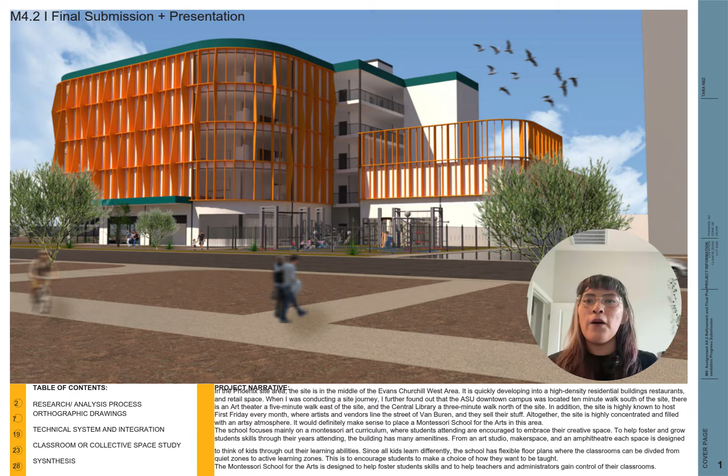This is my final upload for the spring 2026 semester. And this semester I had the opportunity to design a school called the Montessori School for the Arts.

In the beginning of the semester, we did a precedent study analysis. I chose a school for the Montessori by Herman Hertzberger in Delft, Netherlands. Some key components I came across while studying the school were the L-shaped classrooms, which separated the formal and informal classroom settings. And I wanted to take this study analysis into the project I am currently doing.

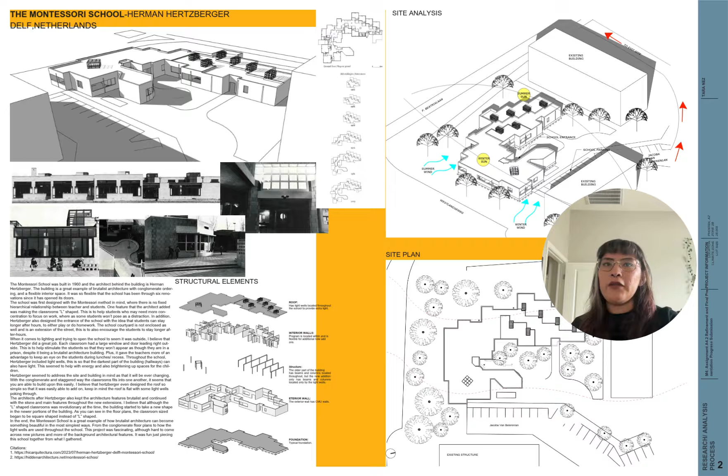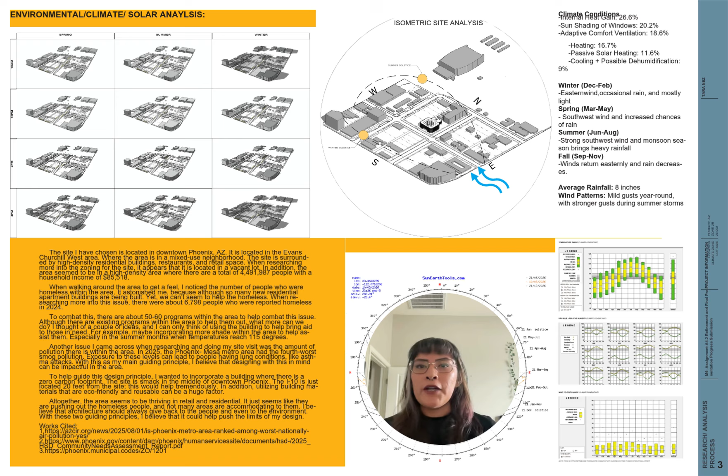So after the precedent study analysis, we started to work on the sites for the rest of the semester. I chose the downtown Phoenix site located on Portland Avenue and 2nd Street. During this time, I did sun studies, I researched the wind, and I researched the annual rainfall in the Phoenix area. And you can see that throughout the graphs as well.

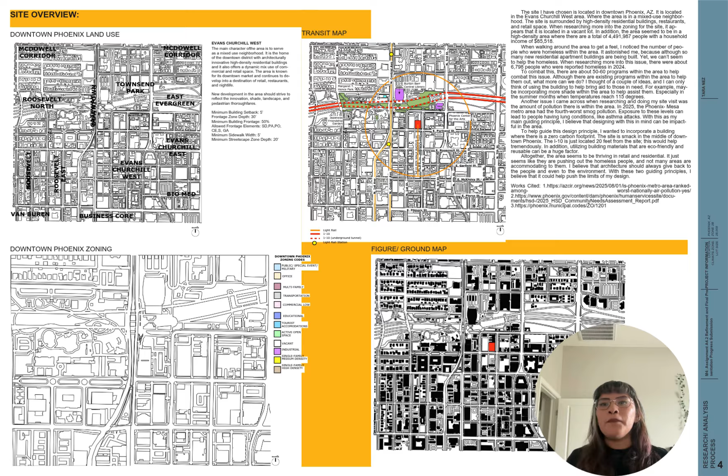So after researching the site analysis, I started to look at the site context in terms of the surrounding areas. I found out that the site is surrounded by empty lots, so you can use those lots for whatever usage you want. In addition, there are many restaurants. It's highly active on First Fridays because there's a First Friday celebration where people come on Van Buren Street and sell their artwork. In addition, there's an art theater just about a 5-minute walk away, and then a 10-minute walk from the ASU downtown Phoenix campus.

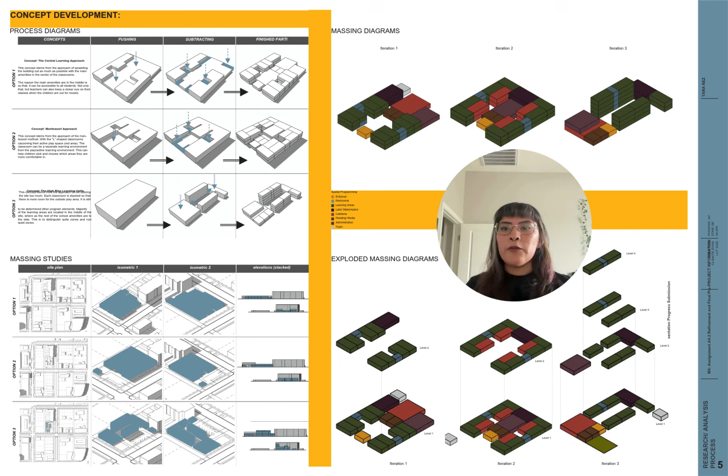So after the site analysis and site context research, we started to do different approaches of how we're going to be designing onto the site. There are 3 that I have conducted: the central learning approach, the Montessori approach, and the high-rise learning units. So moving forward, I did the central high-rise learning approach, where it marries the central learning and the high-rise.

With this approach, learning units are the focal point of the site, and the school offices and administration are in the building to the side. In addition, there are L-shaped classrooms. The school offers an art classroom and a technology classroom. And then there are program amenities, with a library and art space where students can sell their artwork. And in the center, there's an amphitheater, so plays and concerts can happen when there's no usage for the school.

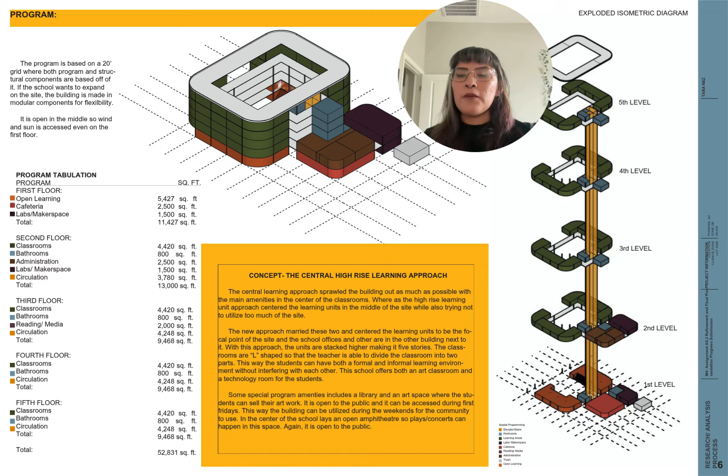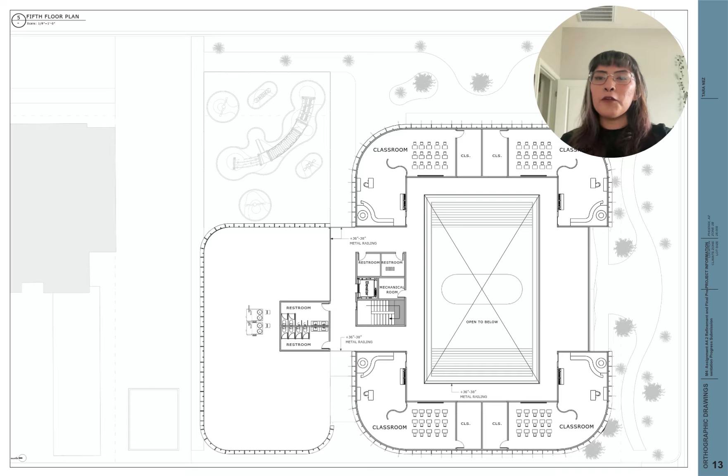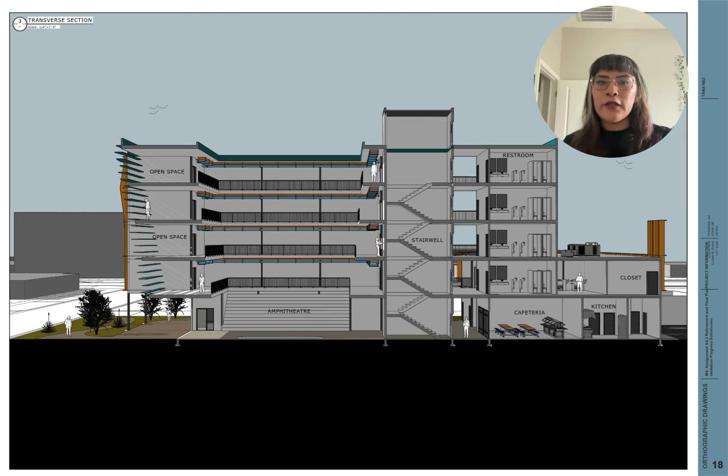This is a transverse section at 1/4 scale. You can see the amphitheater, the teal facade, the cafeteria, kitchen, restrooms, and how everything coexists and is stacked up together. So this is a structural isometric progression.

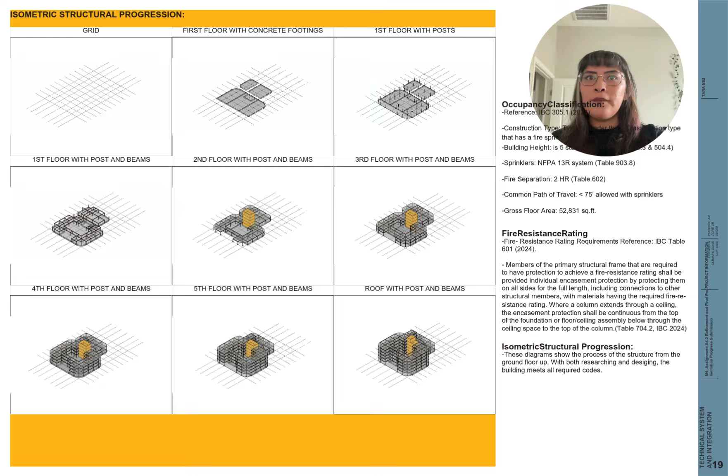The occupancy classification is type 1B, where it is 5 stories at 68 feet. Sprinklers are an NFPA 13R system. Fire rated at 2 hours. Common path of travel 75 feet, allowable with sprinklers, and the gross floor area is 52,831. So this is the exploded isometric of the facade. It is comprised of 4 different vertical fins.

It appeals to the architectural character of the building. In addition, it protects the building from rain, wind, and sun. It improves energy efficiency by insulating and regulating temperature, enhances acoustics, and allows for natural light to come in without

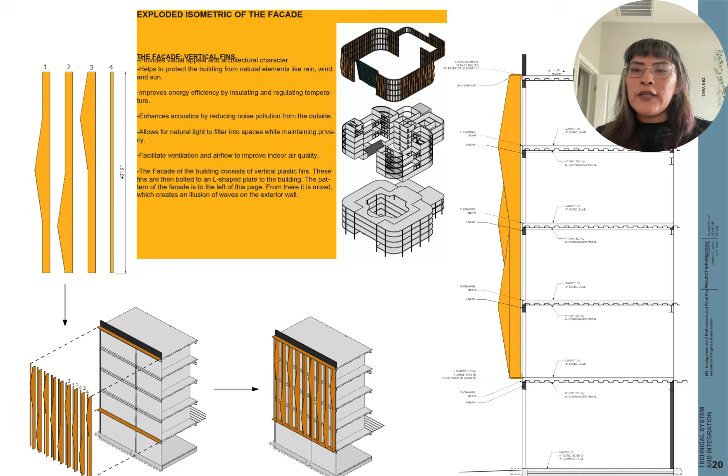sacrificing your privacy. These are held by an L-shaped plate at the side of the building. So this is a passive system that I incorporated into the building.

There's solar geometry and fenestration with the solar shading system, i.e. the vertical fin facades and the horizontal facade. There's natural ventilation coming in, as you can see in the diagram. It comes in through the gap in the building.

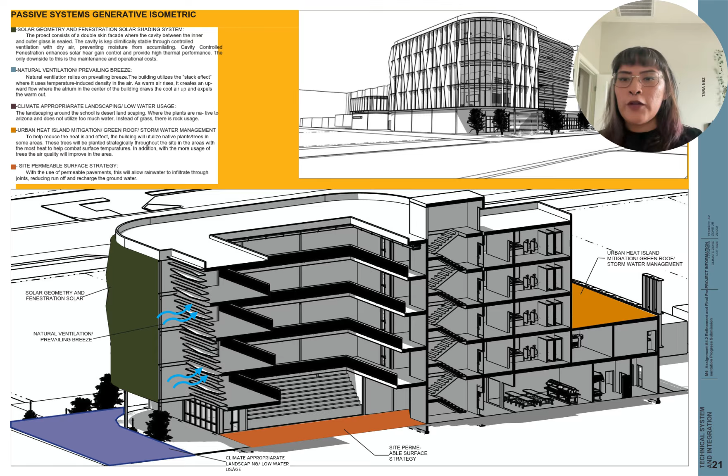There's climate appropriate landscaping and low water usage, so the plants and trees are native to the area. There's stormwater management on the roof, so that whatever water it retains is going back into the land. The site has permeable surfaces as well, so the water can infiltrate and not cause too much stormwater runoff.

So for the active system HVAC, I did the VRF distribution. This one provides precise temperature control for individual zones, energy efficiency, reduces installation space with compact design and fewer ducts, and it also enhances indoor air quality.

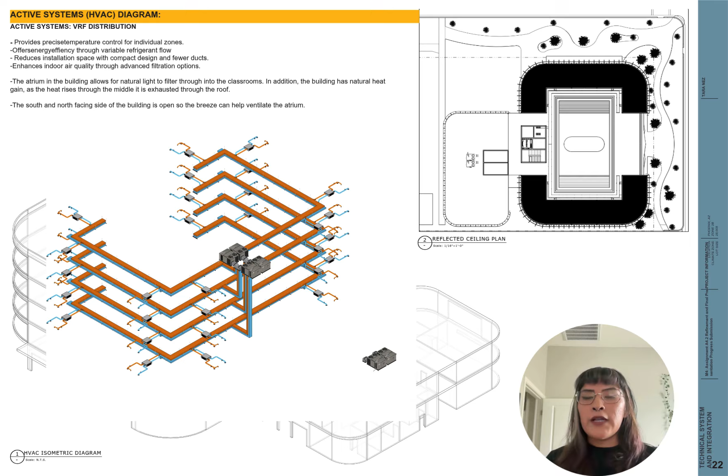In addition, natural breeze can come into the building through the opening on the south facing side. That way it can go in from the south and exit from the north.

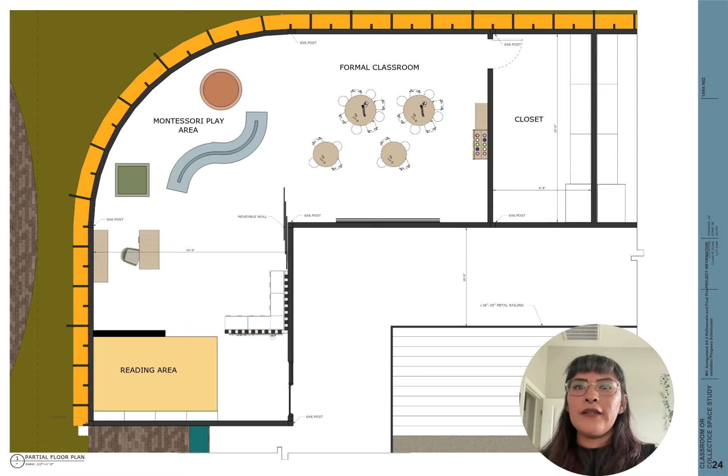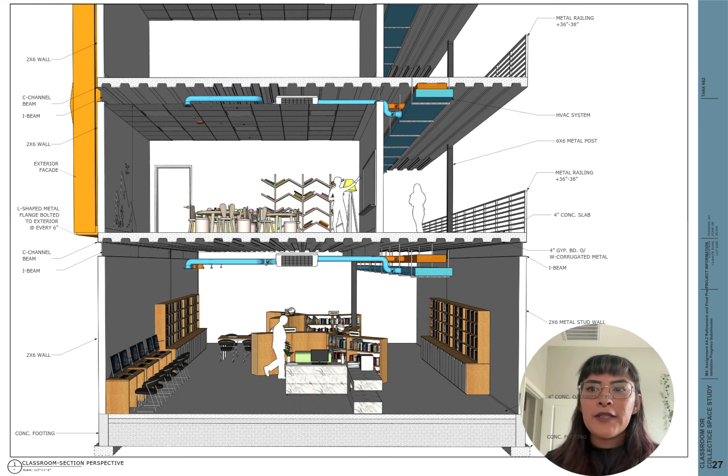As you can see, that is where the library and the classroom are. You can see the C channels, the beams, I-beams, the 6x6 posts, HVAC system, even the corrugated metal, the railings, how everything comes together in this structural system that makes the school.

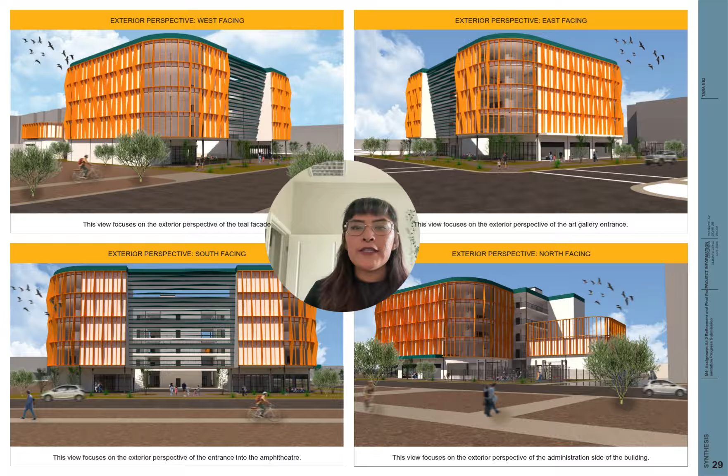The two isometric views and the exterior perspective: the west facing, east facing, south facing, and north facing of the building.

So the key ideas behind it were that I wanted to do an L-shaped classroom, Montessori style, separating formal and informal learning environments. I wanted to incorporate an art space so that people in the community can come for First Fridays and celebrate the spaces. And that's why I designed the amphitheater as well.

In addition, the precedent study analysis of the Montessori school really did inform my design throughout, just because it gave me the idea of the L-shaped classroom. I thought that was a really brilliant idea.

In addition, the design process came a long way. And then the technical systems did impact how everything was stacked, or how I rethought redistributing the HVAC system throughout the design.

So there are many iterations where I had to lean away from this design, but I eventually came back. It was just back and forth towards the end, but eventually I just stuck with this.